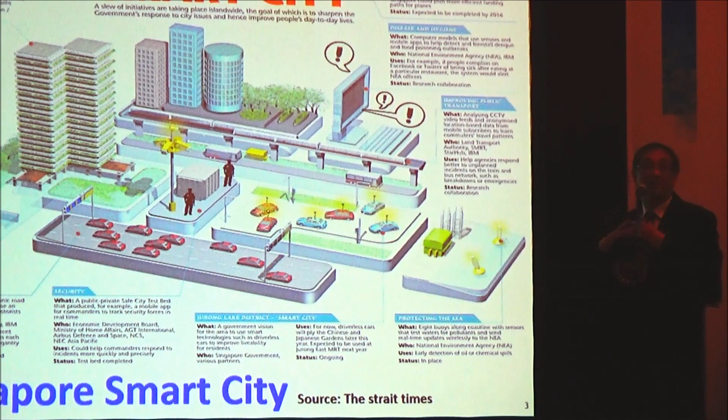Next. So just a very quick sharing. It's an overall view of the so-called smart city that the government is trying to do, and you can see it really covers many different areas. Some of it I will share more information, like 3D mapping. Basically, Singapore is almost done developing a 3D model for the entire Singapore. When I say 3D model, it means every individual building is modeled under this 3D mapping, or we call it virtual Singapore mapping. And not only the external appearance of the building, but for every individual building, we also have, some of you may be familiar, building information modeling embedded in each building. So it's a very ambitious program.

And then we have other things related to urban and sustainable solutions I'll talk about. The other one is called Smart City. You can see the Jurong Lake District Smart City. So the government set up a special area and wants to develop that into a smart city. A lot of researchers from various universities are working together with the industry to look at how it can be done. There are many other things like water quality, transportation, protection of the sea and so on. Those I will not cover in the talk here. So this is just to give you an overview of what this smart city program is about.

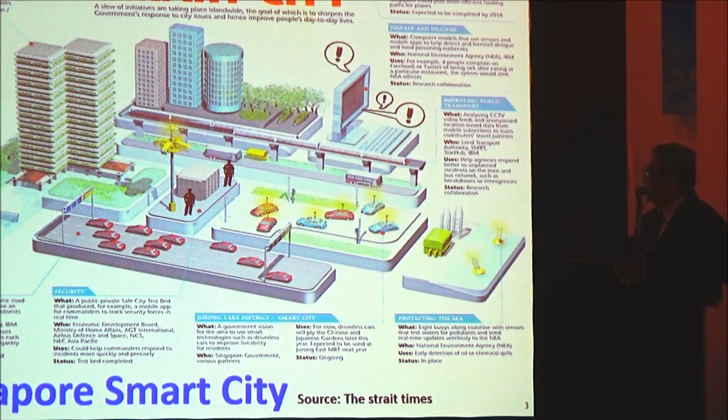Okay, next. You can see this is just a snapshot of this so-called virtual Singapore, creation of a 3D model for Singapore. For those who have been to Singapore, you may be very familiar. You can see the 3D model of the Marina Bay Sands, our famous building with the casino there, and then the Marina Bay area with the new developments and so on.

You can see Gardens by the Bay. So this whole 3D model is now under development, and we are almost reaching the completion of this 3D model now. It's not an easy task. We have spent almost 3 years now developing that, and we had to work with the industry, with some company, to do this model. We'll talk about the usage later. Right? So this is on the virtual.

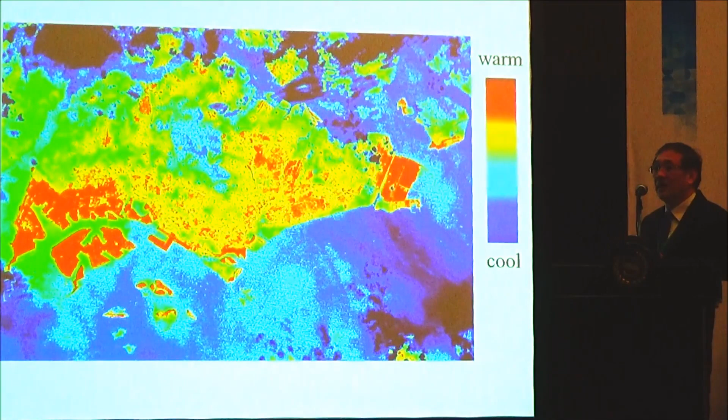Yes, now I want to focus on this special program that I've been quite involved in. It's called the Cooler and Calmer Singapore. Like I mentioned earlier, the government has this ambition of reducing the temperature by 4 degrees Celsius. And this is a research that I've been working on for almost 15 years now. We call it the Urban Heat Island study.

What is actually Urban Heat Island? Urban Heat Island simply means that in the city center, the temperature can be much higher in terms of degrees Celsius as compared to the rural area. For Singapore, a very easy way to look at the hotspots is by using satellite image. So this is using a satellite image of Singapore, and then we use a special software to map out the hotspots in Singapore. So even though Singapore has been considered a garden city, we are actually not spared from having this problem of urban heat island.

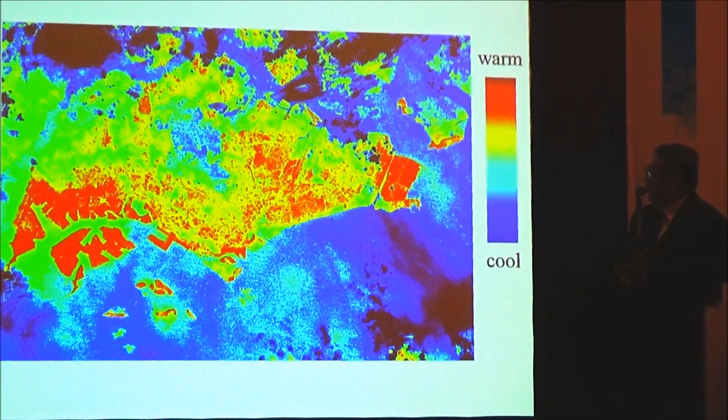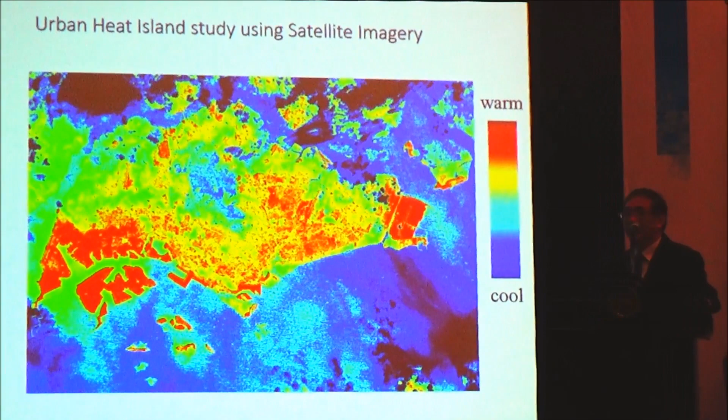For those who are very familiar with Singapore, you can see that the west part of Singapore is very, very hot. This is primarily the industrial area, Jurong industrial area. Those areas are very, very hot. And then you can see our CBD area, our central business district area, on the southern part of Singapore is also very hot. And of course you can see the airport, the Changi airport, is very, very hot. So that gives us a very quick snapshot of the hotspots we have in Singapore. And you can see that in our central catchment area, which is our reservoir, it is much cooler. That's why it is dark blue in color as compared to the red.

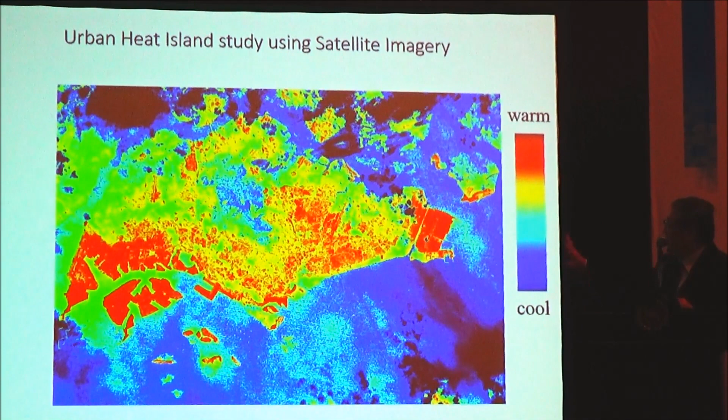Next. We also did a detailed measurement. We set up sensors in different parts of Singapore, and then we monitored that over a long period of time. And you can see that the temperature mapping for the entire Singapore is actually very similar to the one that we get from the satellite image. The pink color, the red color shows the higher temperature, which again occurs primarily on the southern part of Singapore. On the northern part, they tend to be relatively cooler because there is more vegetation. Some areas there still have a lot of forest.

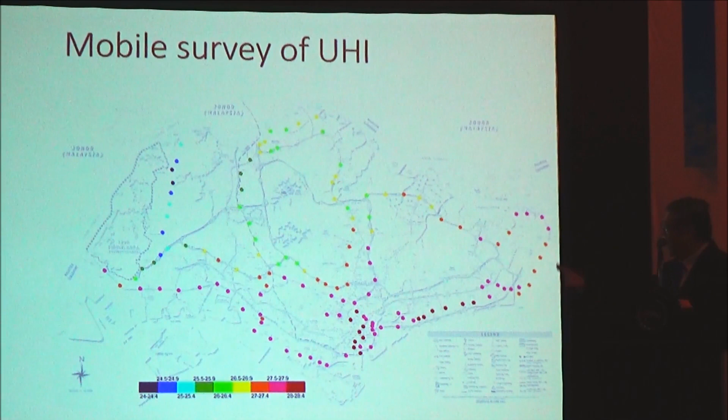You'll be quite surprised why in Singapore we still have some forest. Besides the central catchment area, which is primarily for our reservoir and so on, some of the forests are actually reserved for the army. The army uses the forest to do their training in jungle warfare. So that's why that area turned out to be cooler as compared to the southern part.

Next. So you can see, even though Singapore has a lot of greenery, they try to do a lot of planting of trees and so on, but in the central business district, the temperature easily can be 5 degrees higher than that in the rural area. You can see the one with the lowest temperature is called Lim Chu Kang, and that's the area with a lot of forest for the army training and so on. 4.5 to 5 degrees Celsius. And this result was obtained in 2008.

5 years later, another colleague of mine did the same study and the temperature difference has gone up to 7 degrees Celsius. 7 degrees Celsius. All right, so it shows that we are fighting a losing battle. It's not a simple solution, because as you urbanize, as you have more buildings, as you have more transportation, cars and so on, the temperature will go up. So what can we do to reduce that temperature? And that's precisely what the Cooler Calmer Singapore program is about.

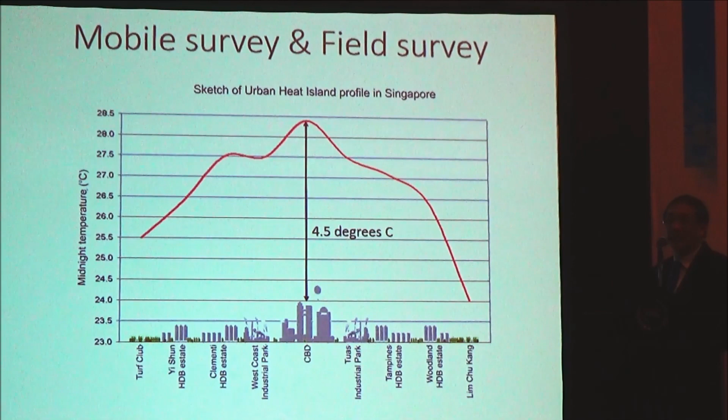Next. Alright, so we started by experimenting at NUS. NUS being a university campus, we want to start something small. So we deployed sensors to different parts of NUS, and then we made use of GIS. I think now you should be quite familiar with what is GIS, Geographical Information System.

We build a 3D model of NUS, and then we map out the temperature. You can see it's a very nice exercise because by monitoring the temperature over a long period of time, we can understand where are the hot spots during the daytime and where are the hot spots during the nighttime.

Now, it is interesting to note that when we talk about hot spots, when we talk about urban heat island, it is a very, very dynamic behavior in the sense that during the daytime, the hot spots can be different from during the nighttime. And this is very important. We call it the daytime urban heat island and nighttime urban heat island. Now you may ask why there are differences. Why in the daytime the hot spots appear in this area, but at the nighttime the hot spots appear in another area? It's very simple.

In the daytime, it's those areas with no shade, very open, that are exposed to a lot of solar radiation. Those are the hot spots. But in the nighttime, interestingly, a lot of the areas with a lot of buildings which are closely clustered together are getting hotter. Why is that the case? Because during the daytime, these high-rise buildings absorb a lot of heat, and at nighttime they start to radiate into the environment. So that is called the nighttime urban heat island.

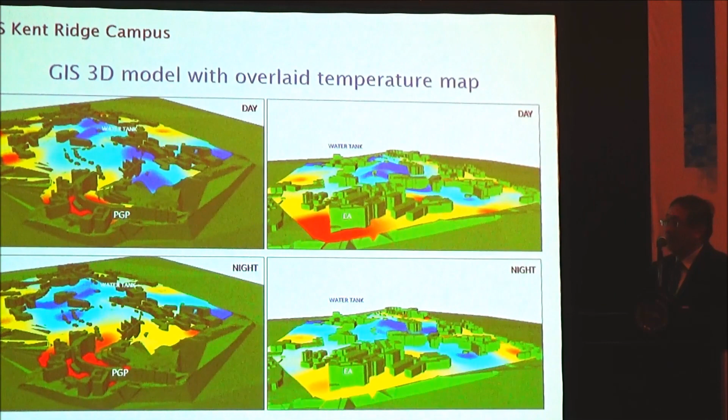So this kind of technology or research allows us to understand where the hotspots are during the daytime and during the nighttime, and we can then design the appropriate solutions to reduce the temperature. Okay, thanks. You can see from here, by using the geographical information system, we have a very good understanding of where the hotspots are during the daytime, during the nighttime, and so on.

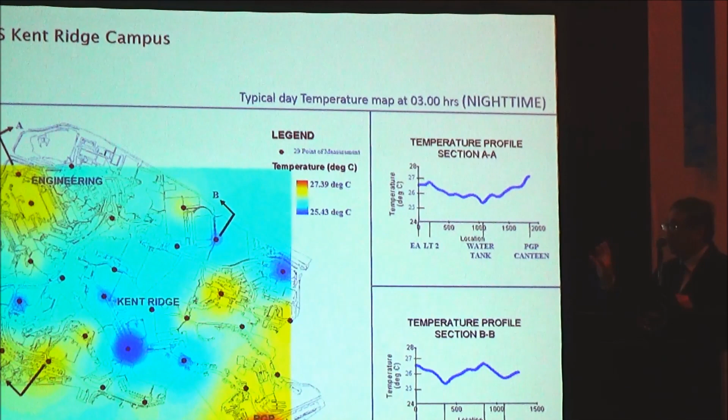Alright, so the next thing we want to ask ourselves is that after we did the study in NUS, understanding the temperature mapping and so on, though it is a very good method, the problem is we need a lot of data. We need to gather a lot of data from sensors. We need to set up temperature sensors throughout the entire NUS campus so that we can understand where the hotspots are.

So people ask us, what about new development? If I want to develop a new area, is my new development good or bad? Where are the hotspots in my new development? Now we cannot use this method, because new development means no buildings there yet. So we start to think, can we develop software? Can we develop a computer program that can help us to predict where the hotspots are? And this is precisely what I want to share with you now.

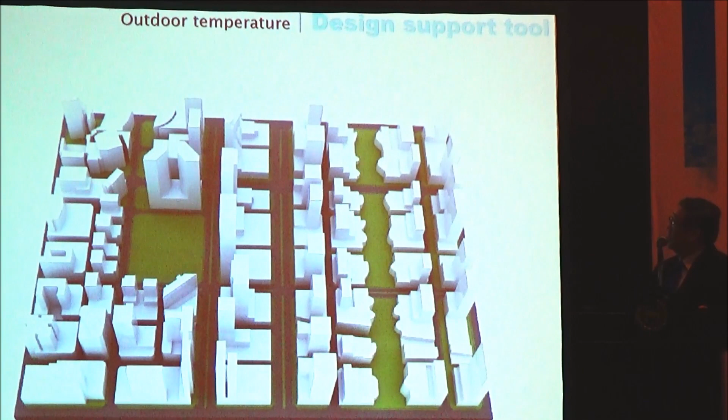So take this example, a new development. It's a very hypothetical example. We want to know where the hotspots are in this area and whether the computer program can predict them. So what we do is we assume that at any point, within the 50-meter radius of that point, what are the factors that are likely to affect the temperature at that point?

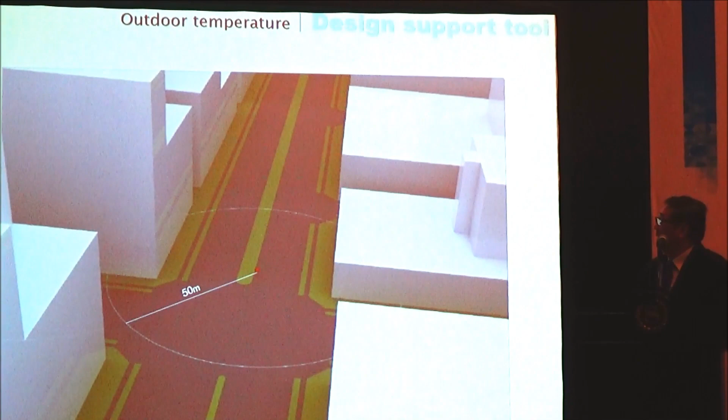So we did a lot of research. Next, just click on it. And we find that these are the key factors affecting the temperature at that point. For example, the building height plays a very important part. In fact, building height is a very important factor.

You find that it does not mean that the higher the building, the worse it is. It's not necessarily so. In fact, a high building is good for the daytime because it can provide good shade. But it's no good for the nighttime because it traps the heat. So we need to understand that. We also look at the wall surface area.

You can see on the left there, there's a word called albedo. What is albedo? Albedo simply means the reflectivity of the surface. We find that the reflectivity of the surface plays a very, very important part. Because if your surface is not that reflective, it means what?

It absorbs a lot of heat, and it can radiate a lot of heat also.

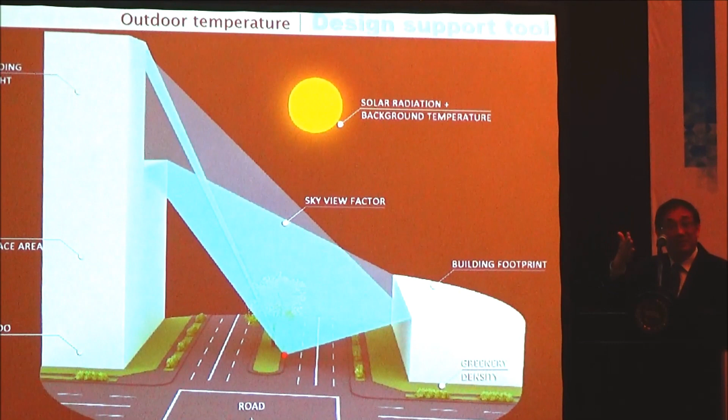The other very interesting factor is called sky view factor. Sky view factor basically means that when you stand in the center of the street and look up, what is the openness of the sky? If you have a sky view factor of 1, it means it is completely unobstructed. If it is 0.5, it means 50% of the sky is blocked by buildings and so on. Building footprint and greenery are playing a very important role as well.

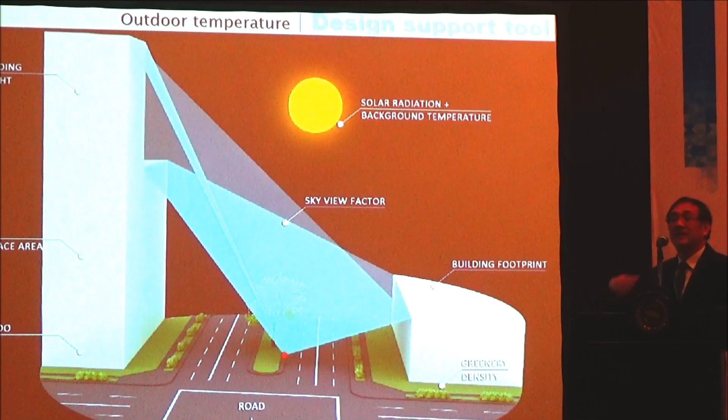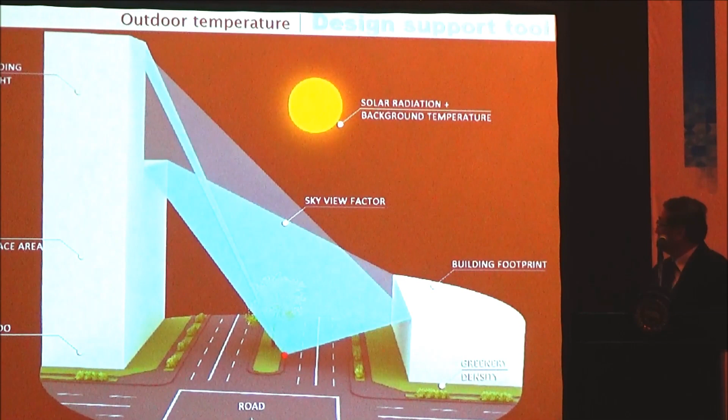So this is how we carry out research to understand the different parameters. We call it the urban morphology factors that can affect the temperature. With that, we developed a software. Because of time, I can't go into the details of how to develop the program, but basically it takes into account all these factors, and with that we can predict the temperature.

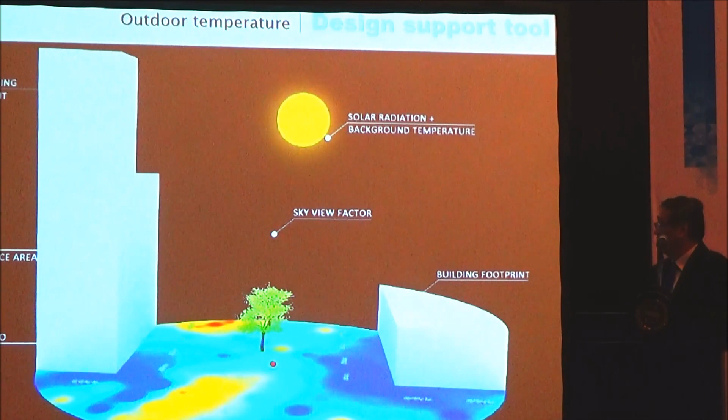Our software can serve to predict 3 different types of temperature. One is called the maximum temperature, which usually occurs in the afternoon between 2 to 3 o'clock, and that is called the daytime urban heat island. We also have the minimum temperature, which usually occurs in the middle of the night, called the nighttime urban heat island. And then we have one that looks at the average temperature. This is how we can now predict.

Comparing the maximum temperature and the minimum temperature, you can see that the hotspots are different. You observe that? You can see that the hotspots for the maximum temperature and the minimum temperature can be different, so we need to be very careful on that.

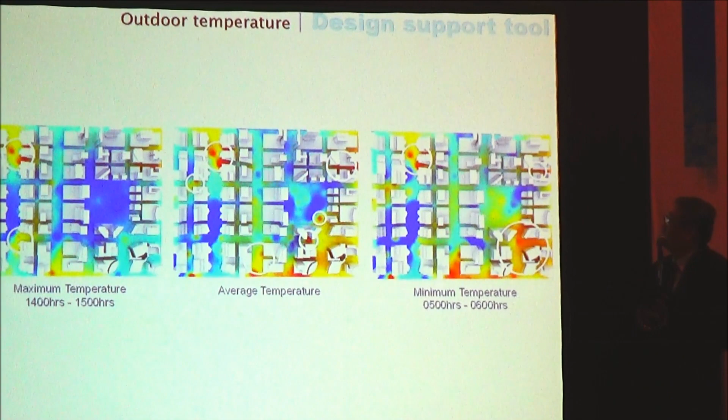After we developed the software, we tried to apply that in a real development. Let me show you one example, which is in One North, a high-tech industrial area.

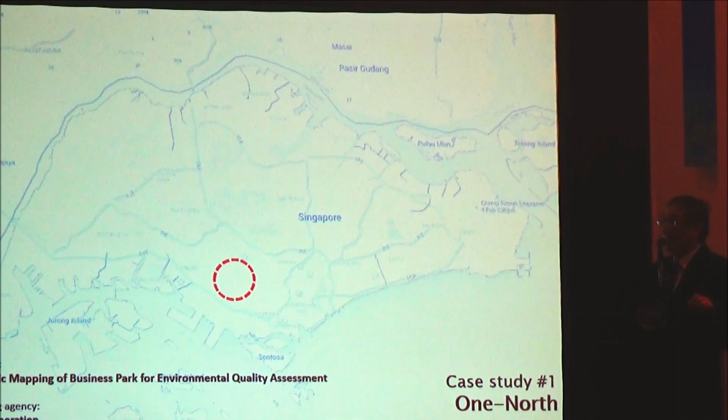Very interesting, we have 2 cases here. The one on the left is the current master plan of that particular area, and the one on the right-hand side is the new master plan. The developer is very interested to know, with the new master plan, will there be a change in the temperature for the whole area? This is what we're interested in.

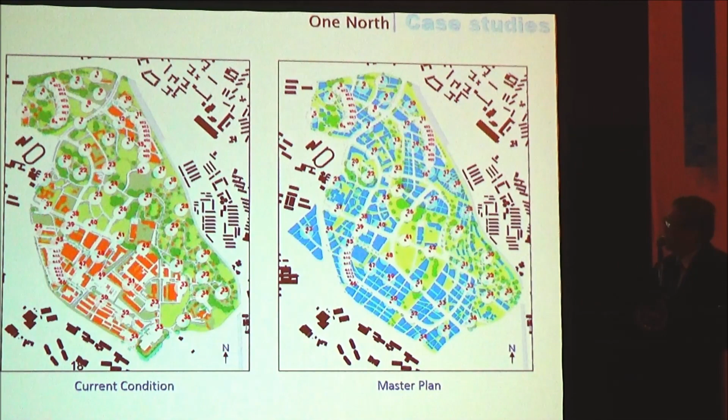Another very interesting thing we are asked to look at is that for the new master plan, there is actually a green belt in the center there.

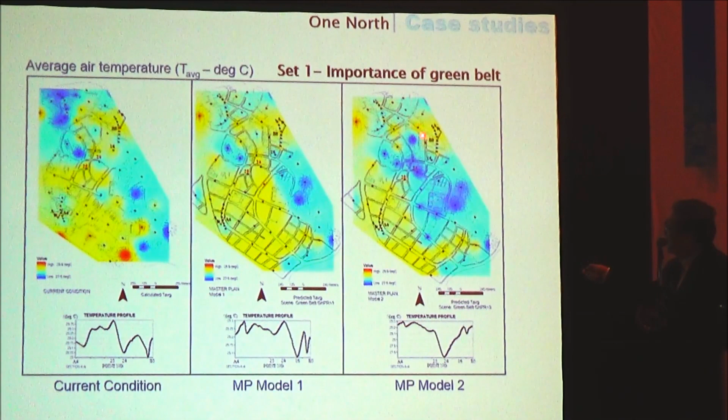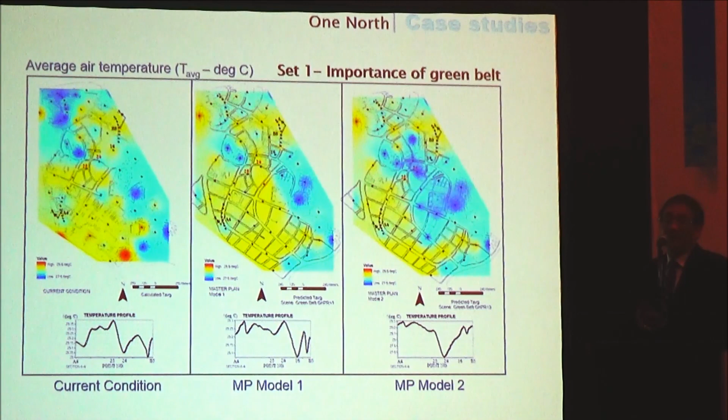Why? Because trees can serve as a very effective means of cooling. You can see this is yellowish in color, meaning higher temperature. Then with more trees planted, the color turns to blue or dark blue, showing lower temperature. We have done many research studies and find that trees are actually very useful for cooling down the temperature.

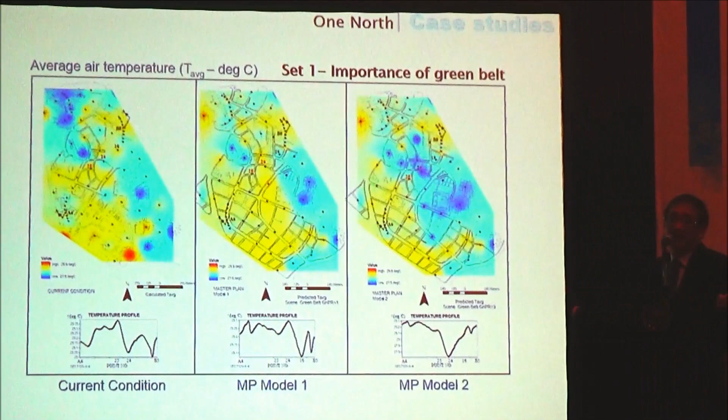First, trees can serve to effectively provide shade. I don't need to explain much - if you park under the hot day, under the shade of a tree or in an area without shade of a tree, you'll feel a big difference after half an hour or so. So shading by trees is very, very useful.

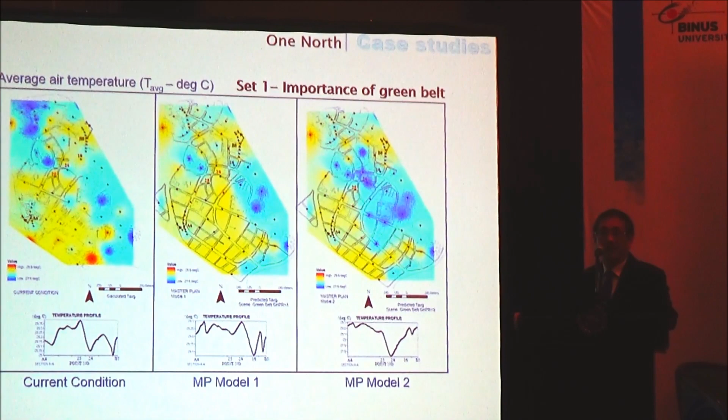Trees have a very interesting behavior called evapotranspiration. What it means is that the moisture lost from the tree converts sensible heat into latent heat, and that produces a cooling effect.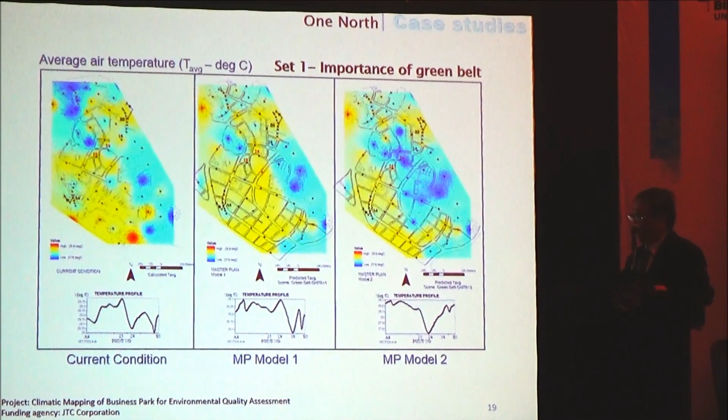We did more study by planting more trees in the hotter areas. You can see it slowly change from yellowish color to blue, and now completely blue. This software allows you to play with the urban morphology factors and greenery.

Okay, so this is just another example.

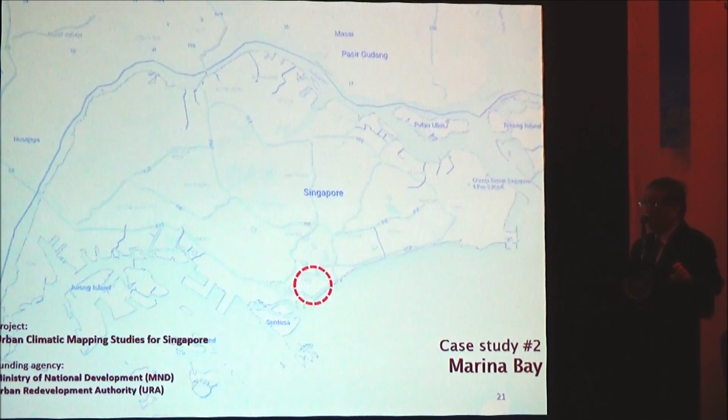By the way, all these projects we worked on with government agencies. One of the projects I talked about is with a government agency called Jurong Town Corporation. This is another project with another government agency called URA, the Urban Redevelopment Authority, or Redevelopment Authority.

This is actually a very important development in Singapore. Just now we saw it in the virtual Singapore model. It covers the Marina Bay Sands development, and this whole area is becoming our new financial center in Singapore, with many high-rise commercial buildings being built in this area.

So URA is very concerned. If we do not develop this area properly, it can block the wind that goes into our central business district, and that will make our central business district even hotter. That's why we wanted to try out this software in this project as well.

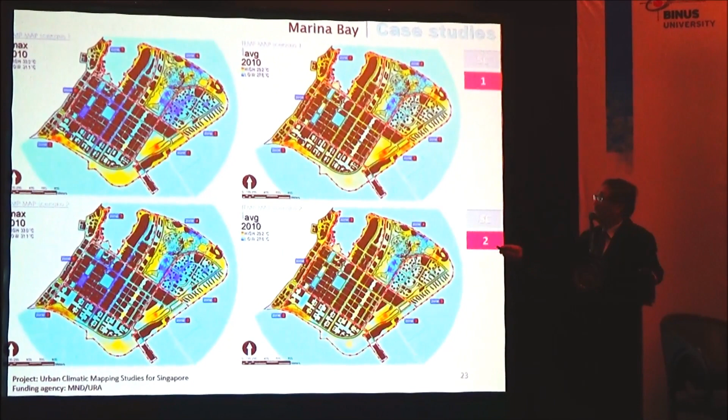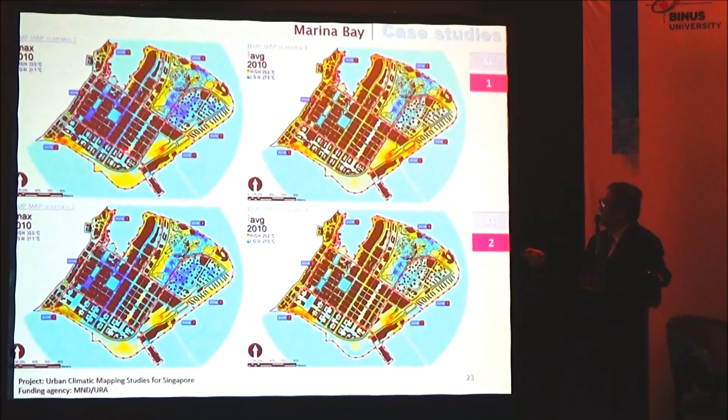So we did the same thing. We modeled the entire marina financial area, and then you can straight away see where the hotspots are and what can be done about that.

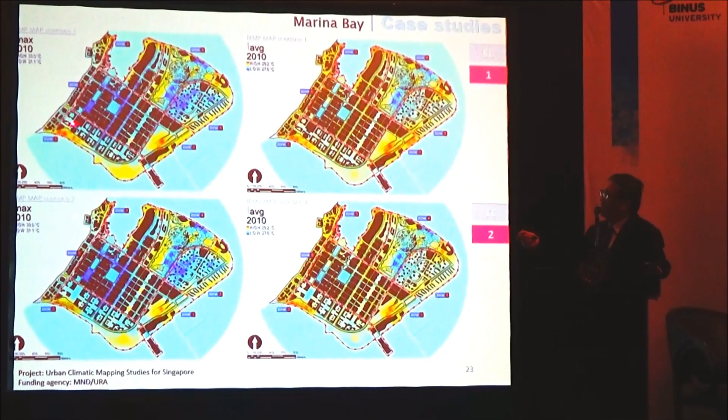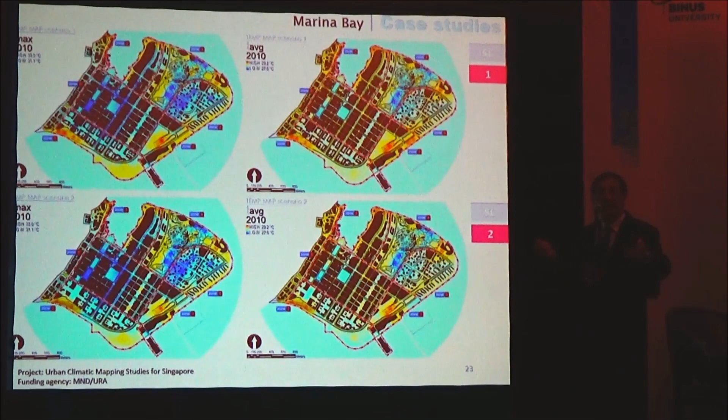For those hotspots, we discussed with the government agency what could be done, for example having more greenery in the area. They were even prepared to move the location of buildings if they found that the buildings blocked the wind. In some cases, if we cannot block or move the building, can we make the building more porous, like having a void in it, so that the wind can get through.

So this is the first iteration, and then the second iteration to reduce the temperature further. This is how we make use of the software and work with the government agency to make the environment cooler.

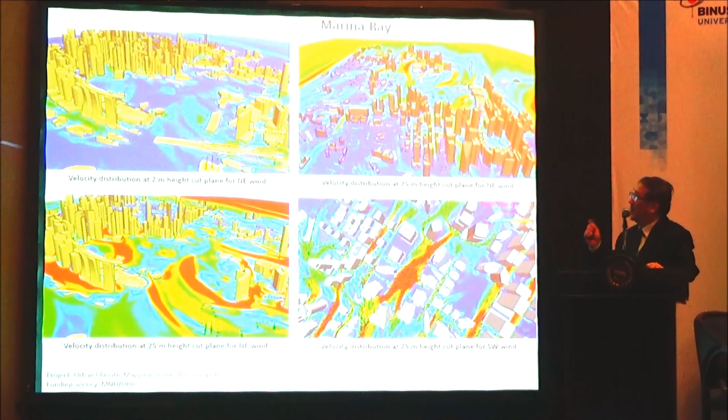We also perform a wind simulation. Wind simulation is a very challenging task because we need to model the entire area, which is about 4 kilometers by 4 kilometers. You can see this is the wind simulation that we modeled, with some familiar buildings like Marina Bay Sands and Gardens by the Bay.

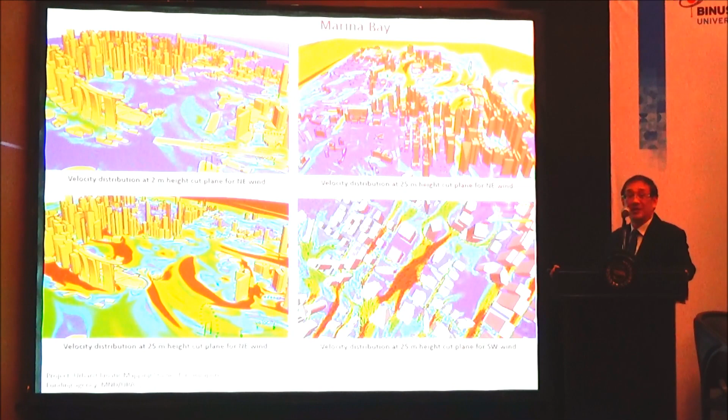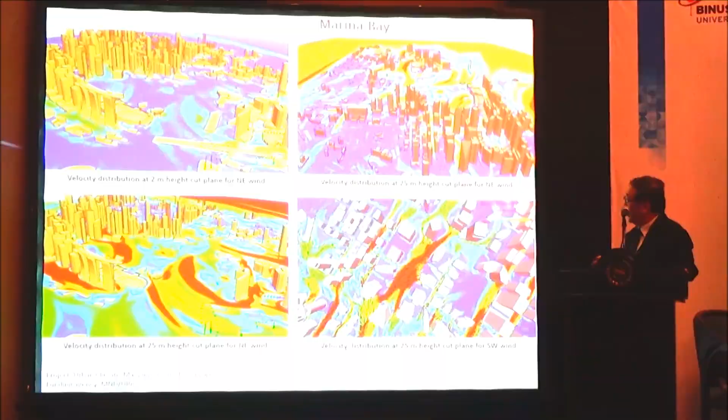This simulation of the wind is done using computational fluid dynamics, CFD software. It's getting very popular for studying wind and ventilation. With that, we can see where there is very little wind, and find a way to improve the wind situation.

Of course, the very important thing we ultimately want to achieve is good comfort. The purpose of reducing the temperature is twofold: one is to improve the comfort of the people, and secondly to reduce the cooling energy consumption, which is a very important aspect for Singapore.

To improve comfort, we use a thermal comfort index. We map out the temperature in GIS, we map out the wind in GIS, and we combine these two together to come up with a thermal comfort map. With this map, we can discuss where the uncomfortable areas are and what we can do to improve comfort.

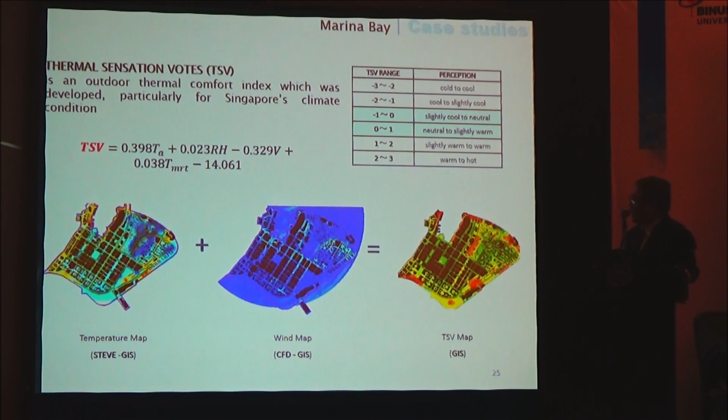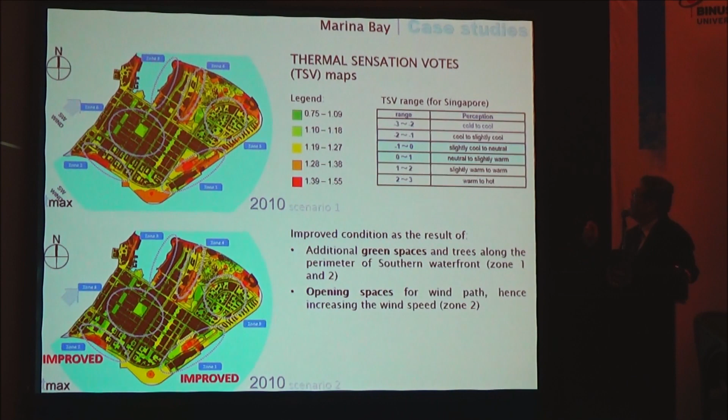This is pretty much the same approach, showing the original thermal comfort map. Again, we see where the uncomfortable places are, and then we discuss whether we can improve the wind, add more greenery, or shift some of the buildings. So these are some of the things that we can do.

So we come up with something like this as a recommendation to the government. For example, we find that the roads here are very important, because the orientation of the roads should be done in such a way that it can allow the wind to channel through. We call it a breezeway. So we should discuss with the transportation authority when they design the road, to see whether the road can face the prevailing wind, so that it can serve as a channel for the wind to get through. So this is something we can do.

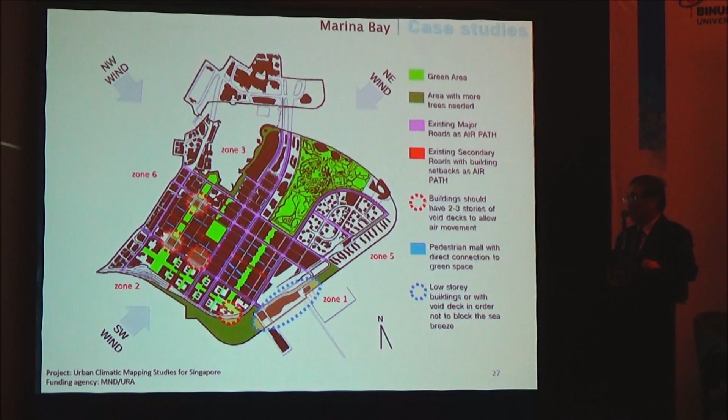Of course, we also recommend a lot of greenery to be introduced to different parts so that we can cool down the temperature. We even build connecting parts to link the greenery together, to help lower the temperature. So this is just an example of a project we worked on with a government agency to see how we can optimize cooling in a particular area.

Of course, people may ask: okay, you develop a software, you use it to predict the hotspots and so on, but how do you know whether your prediction is correct? How do you know your software is working properly?

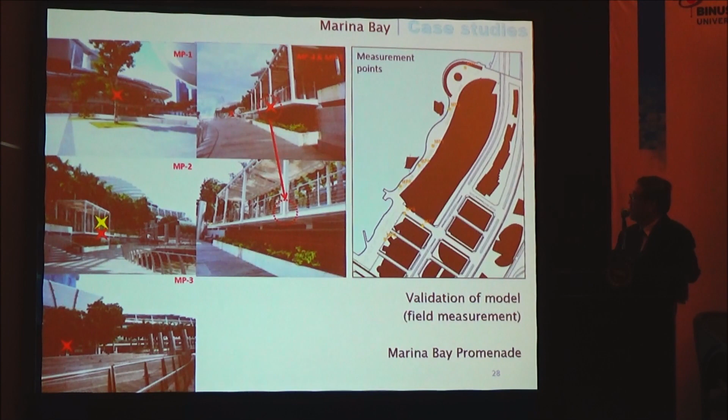So we do a lot of measurement. We set up sensors in different parts of Singapore, then compare that with the prediction results. This is another setup — we set up almost 30 points in different parts of Singapore to measure the temperature and so on, over a long period of time.

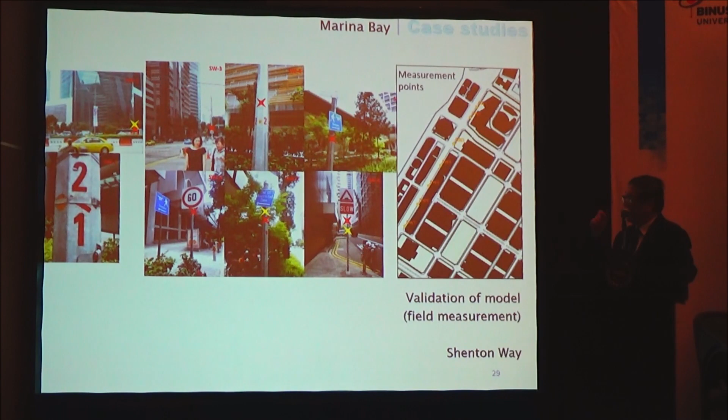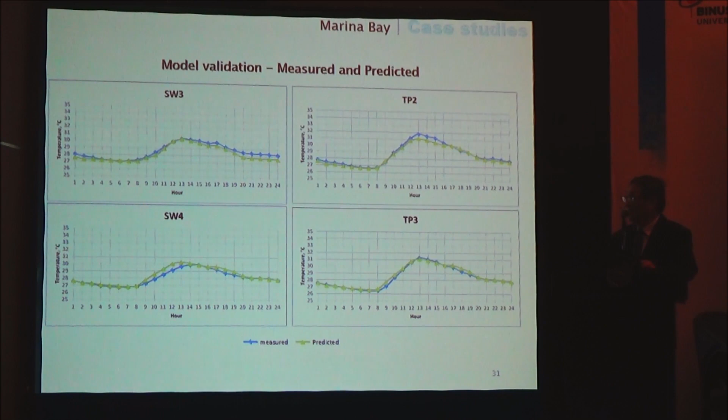You can see many points, and we compare them. The blue line here shows the real measurement, and the green line shows the one obtained from the prediction model. You can see that it matches very well, with only very minor deviation. So it shows we are very confident that the software, the computer model, is working properly.

We also looked at situations where the predicted temperature and the actual measurement show some deviation, and tried to find out more. In fact, we found that sky view factors play a very important role. For example, when we modeled the sky view factor for this one, we took it as 0.65, but the actual measured sky view factor was 0.059. That shows it can impact the results. So we try to understand more about the behavior of the software.

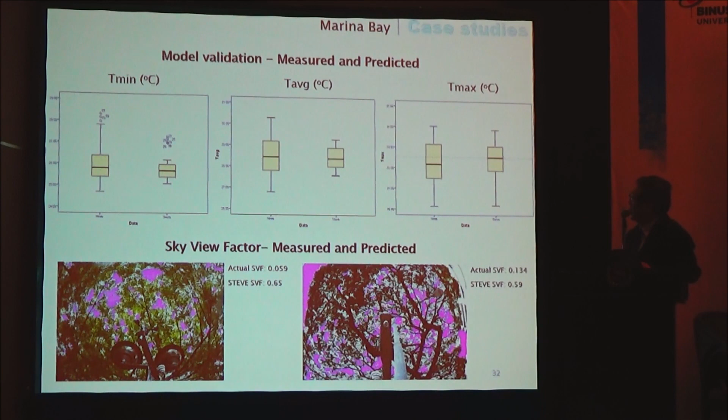This is another application of the project, a very interesting one. It's a residential project done by another government agency called the Housing Development Board, focusing on housing development for residents. One very interesting feature we were asked to investigate is water bodies — for this project there's a very huge water body, which is why it's called Punggol New Town, Punggol Waterway.

People want to know, if we have a water body, is it effective? The understanding is that if you have a water body, there may be evaporation of water, and that can produce cooling. So we tried to understand that too. Interestingly, our results show that water bodies are not really that effective compared to trees, compared to greenery.

Now you may ask why water bodies are not as effective as greenery. First, water bodies do not provide shading. It's purely based on evaporation of moisture, which greenery can also do. So water doesn't have that shading effect.

The other issue with water bodies is that even though evaporation causes some cooling in the hot afternoon, during the night time the heat absorbed by the water body starts to radiate, causing the nighttime temperature to be higher, which is no good. Especially in residential areas, where people come home at night and stay home, that's exactly when the water body radiates a lot of heat. So compared to water bodies, greenery is still a lot more effective.

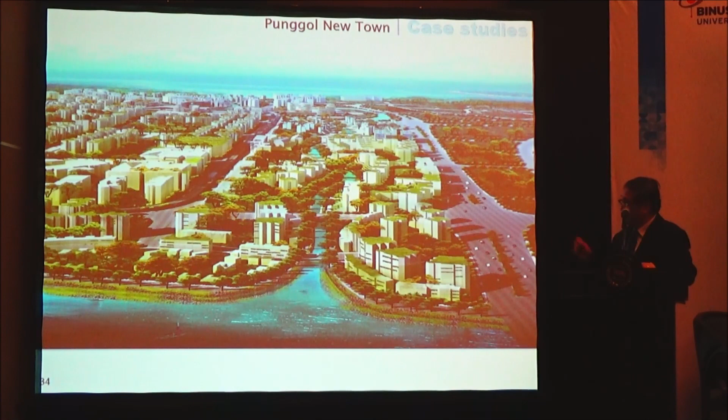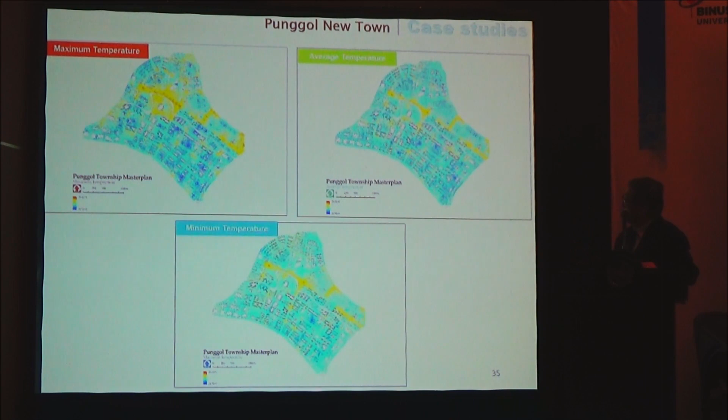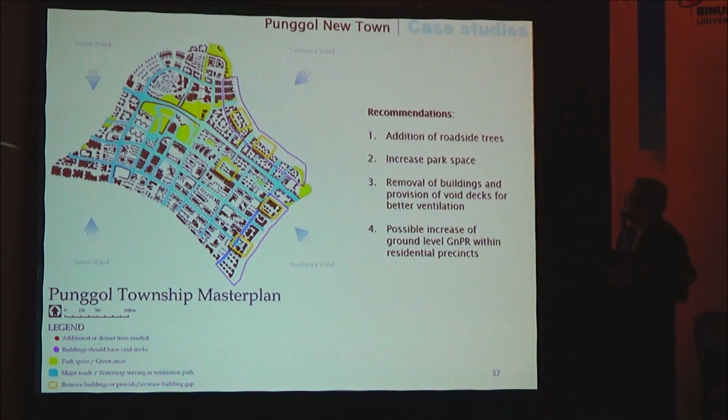So we did the same thing, let me go through this quickly. We map out the temperature, we map out the wind also. Then we come up with this recommendation as well: where should be the major roads that allow the wind to get through, where should be the areas that we should have more greenery, and how should we place the buildings and so on, so as to optimize the cooling for the entire area.

Now I want to quickly talk about developing an integrated analysis tool. Currently, those examples I shared with you are using geographical information system, GIS. Some of the researchers here may be familiar with that. But unfortunately, we find that architects and urban planners are not familiar with GIS. When you ask them why they don't use GIS for their design, they don't know how to do that. They are not familiar.

So we have been thinking about this issue: how can we make this software more user-friendly? This is what I want to share with you now. So this is the one I mentioned, using GIS, which people are not familiar with. Then we move on to look at something now.

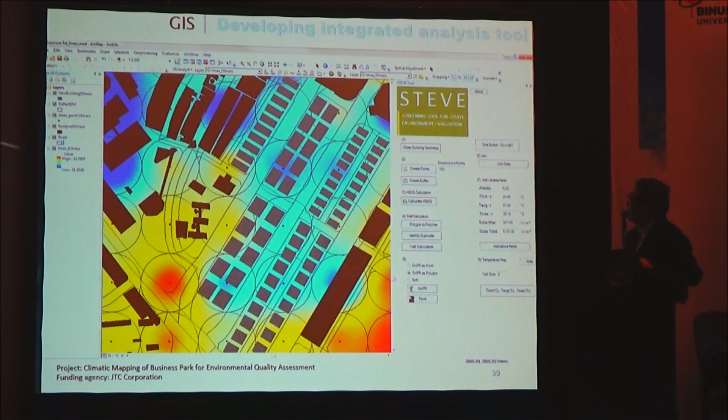So what we do now is we make use of SketchUp. For those from an architectural background, you will be very familiar with SketchUp. Maybe engineering also uses it. SketchUp has been a very popular tool used by architects and designers because, first of all, it is very easy to use, and secondly, it is free. It's developed by Google, so you can use it free of charge. So people love it. So we develop a plugin within SketchUp so that you just use SketchUp in a normal way, then pull up this plugin to map out the temperature.

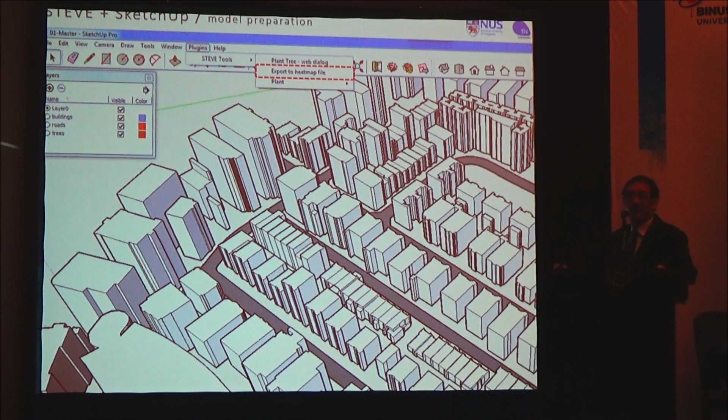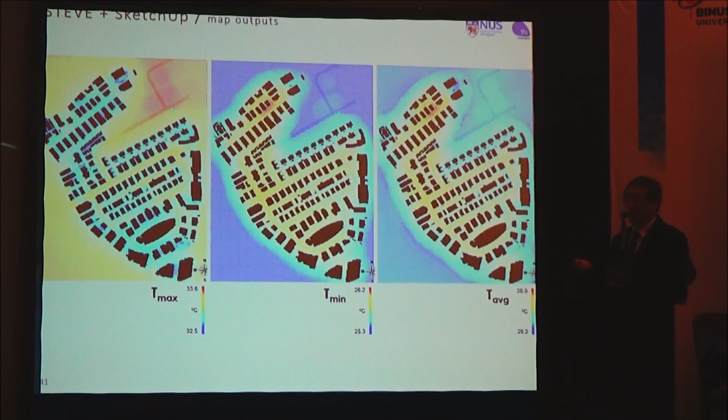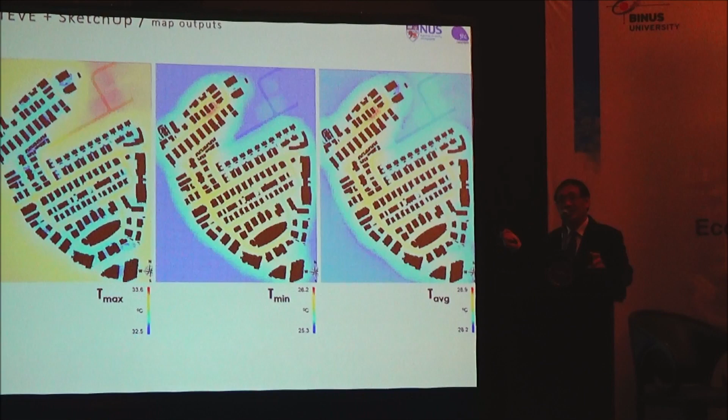Let me quickly show you some examples. So this is SketchUp. With the plugin within SketchUp, you can now understand the heat, the temperature distribution, the maximum temperature, the minimum temperature, the average. All this is done within the SketchUp environment. So training in using this becomes very easy, because if you are familiar with SketchUp, you will know how to use this tool. So this is what we've done.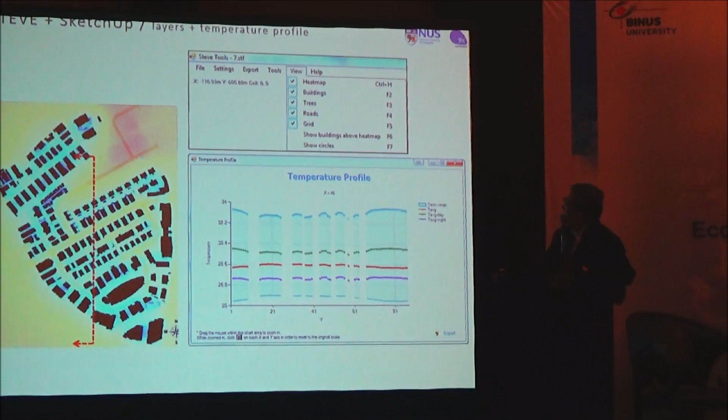We also have average temperature during the daytime, average temperature during the nighttime, and the sky view factor. We can cut a section within SketchUp and get the temperature profile: maximum temperature, minimum temperature, average temperature, and so on.

This is the part that is very interesting. You can use the database within this plugin to understand the cooling effect of greenery. We built up a database within this plugin based on a massive collection of greenery data for Singapore, which I believe is the same in Indonesia. So you can use the database and start to play with planting trees in different parts of your urban design - for example, palm trees, mature trees, or you can play with the area of turfing, shrubs, and so on.

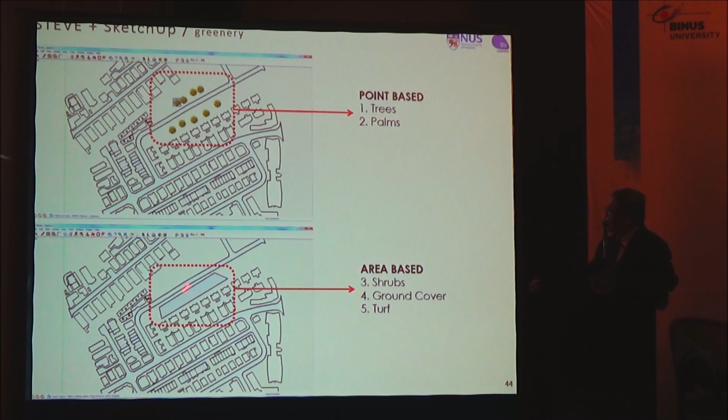With that, you can understand - this is without greenery, this is with greenery introduced - what is the reduction in temperature. So that allows you to give a very quick evaluation of how your planting of trees, how the introduction of greenery, can help reduce the temperature in this area.

This is another very interesting feature, introduced by introducing the greenery. Greenery has another added advantage in that it can capture carbon dioxide - we call it carbon sequestration. With the amount of greenery introduced, it can tell you the species of greenery you have introduced, the carbon storage, and the carbon sequestration that can be achieved by the introduction of greenery.

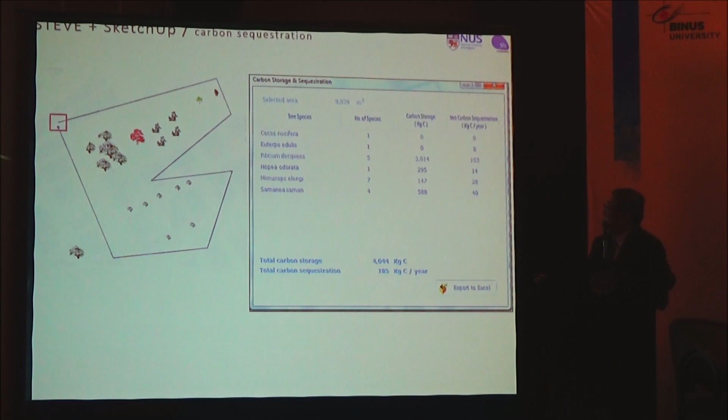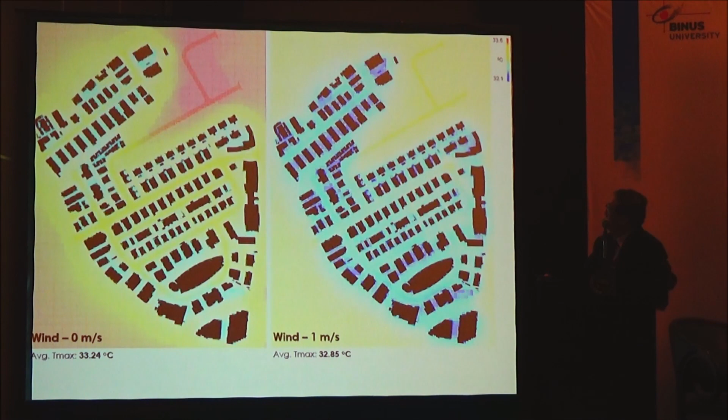We can also look into the effect of wind - this is without wind, this is with wind, showing how the wind can help reduce the temperature. Sorry, I need to go through that quickly because of time. We also look at the cooling energy implication.

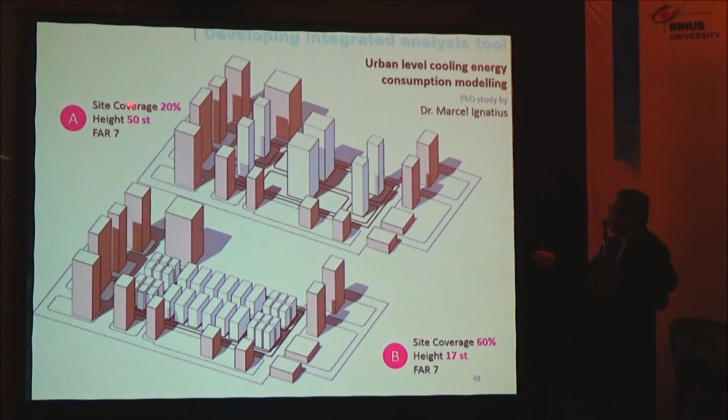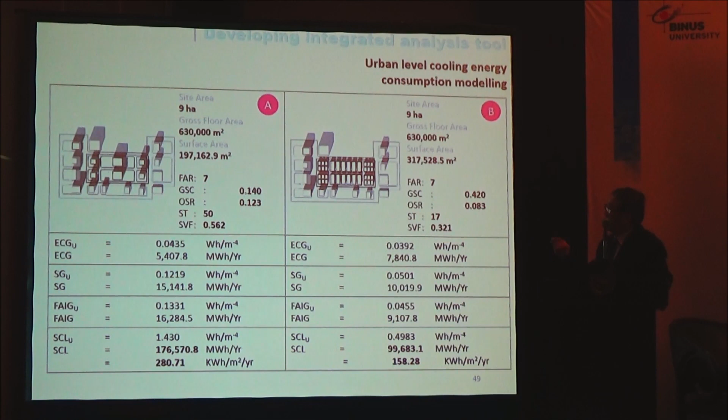So we can also look at the energy consumption for these two schemes, even though the site area is the same. So it shows that even though you have the same site area, because of the way you arrange your buildings and so on, the total energy consumption could be different. So we also have something that allows us to evaluate this using the software. Okay, so that is on the SketchUp version of the software.

Now, any one of you here, if you are interested in the software, you can approach me. We can allow you to actually make use of it free of charge for 1 year. So just contact me if you are interested, if you think that it is useful for your research and so on. And it's very, very easy to use.

Okay, before I conclude the presentation, this is a very interesting project that's ongoing now. We want to link up the climate model with the city model with the building model. So that's why it is called an integrated multi-scale and multi-physics urban microclimate model. Now this is very important, right? Because, for example, we all know that climate change is getting very serious. So we want to know how climate change can impact our urban environment, can impact our building design.

So that's why we now develop this model to link up the climate model, the city model, the estate model, and then the building model. Right? So it's an ongoing project. It's very challenging. It's not easy. For example, in the case of a climate model, we are modeling the entire climate system of the Earth, and how do we downscale it in such a way that it becomes useful for Singapore or for other cities. And this is the part that we are working on now.

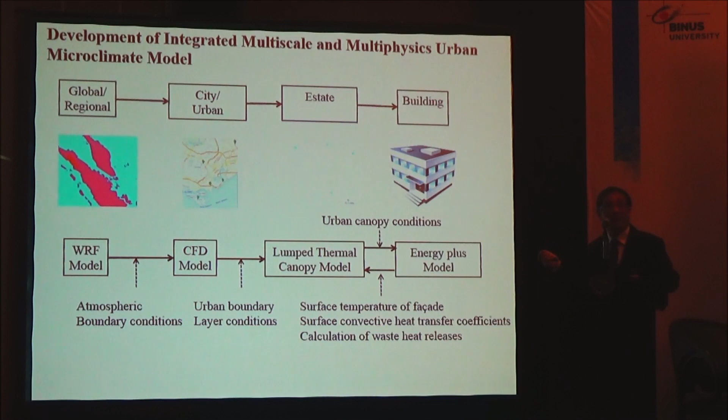And the nice thing about this is that this model also allows us to look at the interaction, for example, between this and this. How your building can produce waste heat that can impact the temperature of your immediate surrounding, and how your immediate surrounding can impact the cooling energy of your building. So this model will allow us to do that. Okay, next. Just to quickly finish this part here.

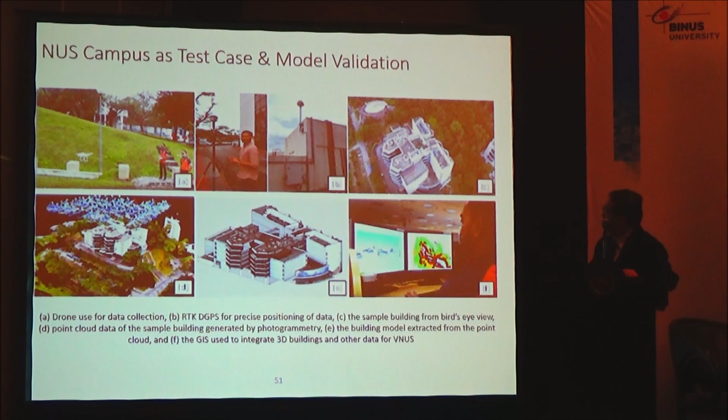Now we are also doing more testing in NUS, developing again a 3D model for NUS as well, and then doing more testing, more setting up of the sensors and so on. Okay, very quickly, let me show you a very short video of this NUS testing. Next. Yeah. This is a 3D model of NUS. You can see how we have developed this model. A lot of work is being done to develop this 3D model of NUS.

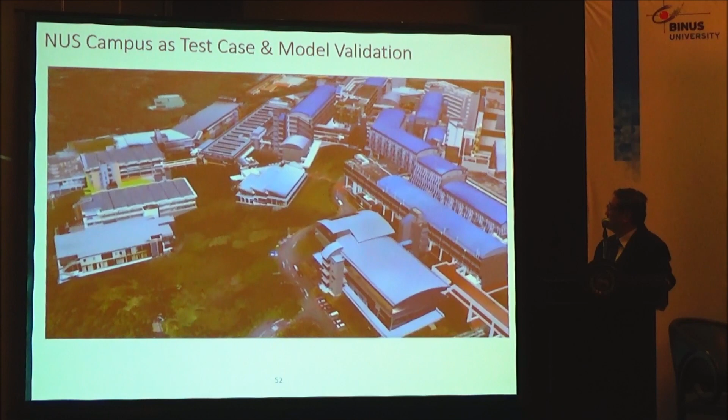You can see a very, very detailed model. The facade details, the roof details, everything is modeled. And this is done by using drones and also a ground LiDAR system to build up this entire 3D model of NUS. Okay. This is our engineering faculty. Okay, we also model the terrain. We don't assume that everything is flat. The whole terrain, up and down, has to be modeled properly as well.

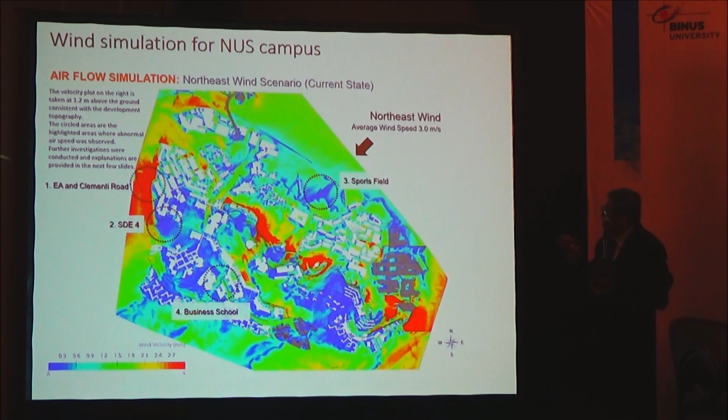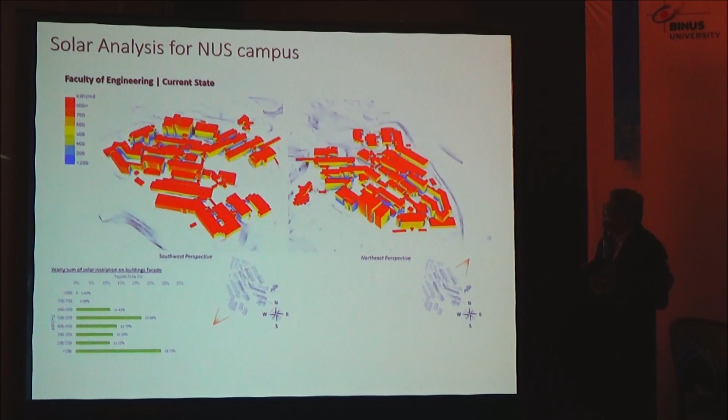Currently, there's a very interesting project that's ongoing now in my School of Design and Environment. We are developing a net zero energy building. Right? Net zero has a meaning. It means that over the entire year, the energy that's produced by renewable sources, which is basically solar energy, is more than enough to cover the energy that's used up by the building. Because of the time constraint, I won't go into the details of this. Actually, you can Google zero energy building in NUS. There is a video on YouTube that you can watch.